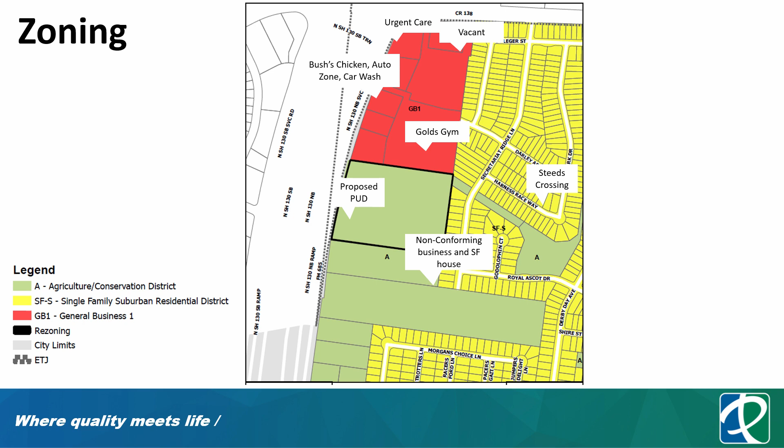The site is bolded - it's the area in the bolded black outline just to the north. In red is zoned GB1, our general business 1 zoning district. Existing uses there include the Gold's Gym, a few commercial uses along the frontage road. To the east of the subject property is the Steeds Crossing single family residential neighborhood. Immediately to the south is zoned Agriculture/Conservation District, and as you see here, there's a non-conforming business and a single-family house. To the west of the subject property is the SH-130 corridor.

The comprehensive plan for this area calls out a future land use of mixed-use commercial. Mixed-use commercial is intended in the comprehensive plan to be more for high-intensity development, including retail and commercial. The comprehensive plan also identifies an ideal mix of land uses in these future land use districts, and in this case it calls for roughly a 75 to 25 split, with the majority of the land uses being non-residential.

Of those non-residential uses, retail is the preferred non-residential type. The subject property is also located within the Commons District, one of our neighborhood districts also adopted in the comprehensive plan. The Commons District consists of several different types of existing land uses - single family throughout existing neighborhoods, and along the corridor more intense retail and commercial development. This current site is on the furthermost western portion of the Commons District.

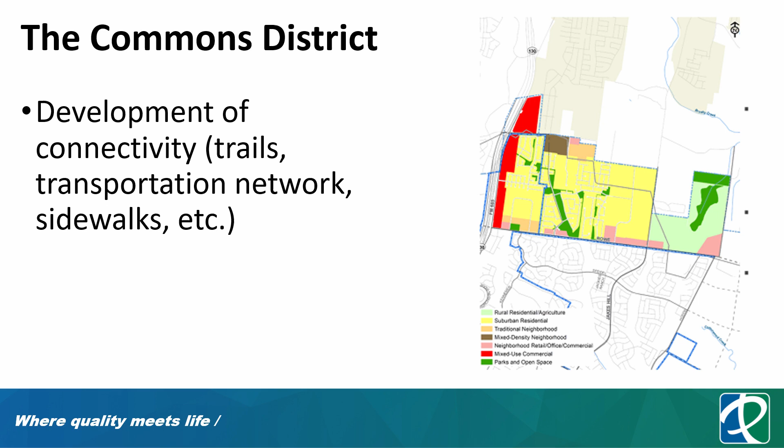So the request under review tonight is again for the planned unit development zoning district with a base district of CL4. I'll run through some of the proposed development regulations, and we'll have a few slides that show the concept plan, the layout, and landscaping plan.

Again, as y'all might recall from last week, we talked about planned unit developments. These are much more high level, more detailed development review processes. So what you're reviewing now is what we as city staff would review further future applications based on the UDC guidelines, and that will vary depending.

The first is the density. The first requirement is that it limits the maximum density to 40 dwelling units per acre, and that calculates roughly to 470 multifamily units and 10 townhouse units.

There's a minimum of 17,000 square feet of walk-up commercial retail that's integrated vertical mixed use for the structures along the 130 corridor. Multifamily and townhouse would be allowed by right.

It's proposing an enhanced buffer adjacent to the Steeds Crossing neighborhood. Everything immediately adjacent to Steeds Crossing has a higher buffer requirement than what would be under the base code. We'll get into that again in a little bit. It's also proposing structured parking.

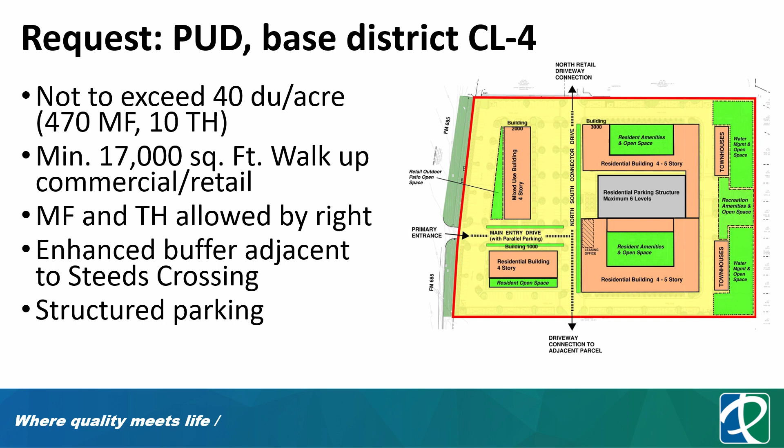So here you see the location and orientation of the buffer. Everything to the far east of this tract is the Steeds Crossing neighborhood.

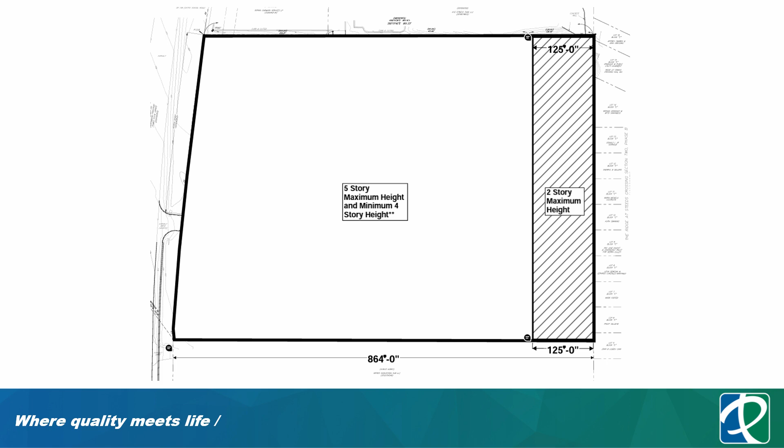The proposed PUD includes a 125-foot buffer where the maximum height is set at 2 stories. Everything outside of that hatched mark area has a maximum building height of 5 stories and a minimum height of 4 stories.

There's a minimum density requirement of 10 dwelling units per acre, and that's to encourage the mix of uses so that it's not all commercial or not all residential. It also is proposing enhanced landscaping along the Main Street entry point.

So these roads throughout are proposed to be private drives, not public right-of-way. The proposal identifies it as the Main Street, but it is really a private drive. And along those private drives, the PUD is also proposing additional landscaping, additional trees and plantings.

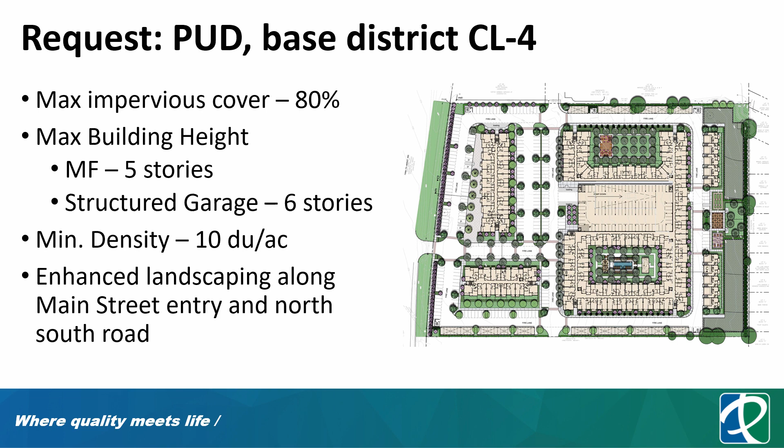Here we have more detail of the concept plan. Starting on the eastern side, you see the 125-foot buffer. This is where the proposed open space and water detention is planned to be located, as well as the townhomes.

On the far western side, along the 685 frontage, you see the mixed use, the 4-story mixed use, vertical mixed use buildings. And then in the center are the residential buildings, the 4 and 5-story residential buildings. Between those two is the structured parking.

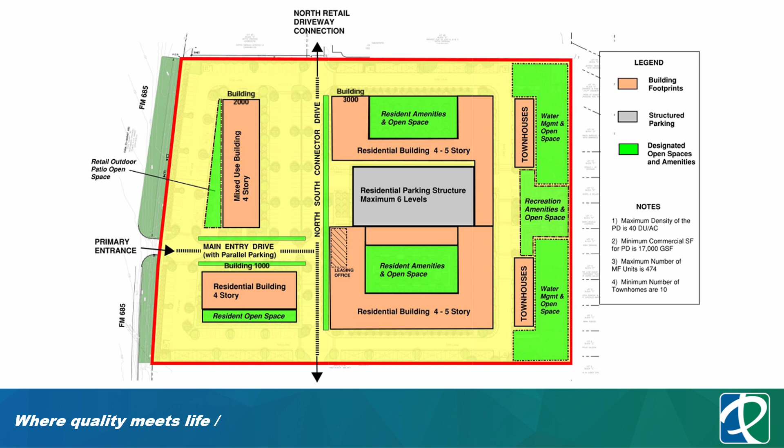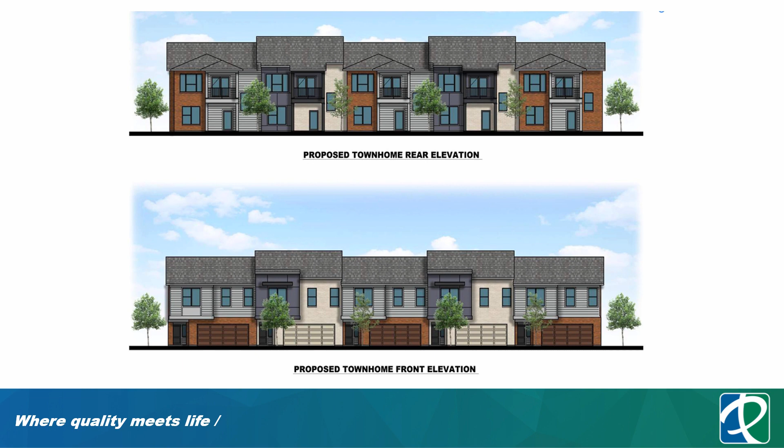The next few slides will just be renderings of what the eventual structures might look like. This is the townhome exhibit. This is the rendering of the structures along 685. And these are the interior structures, primarily residential structures located in the interior of the site.

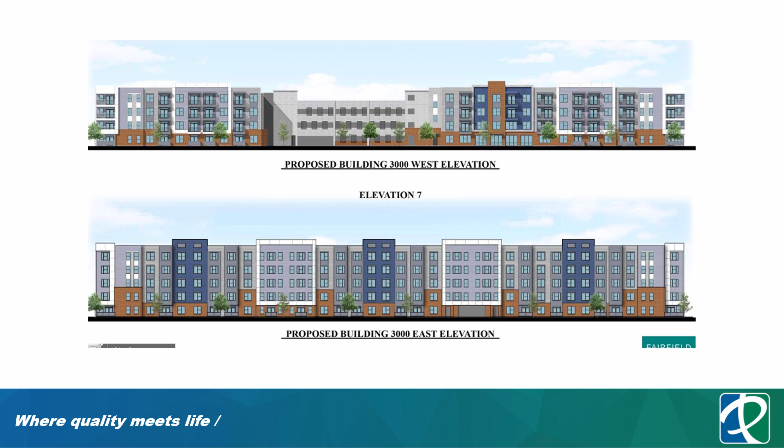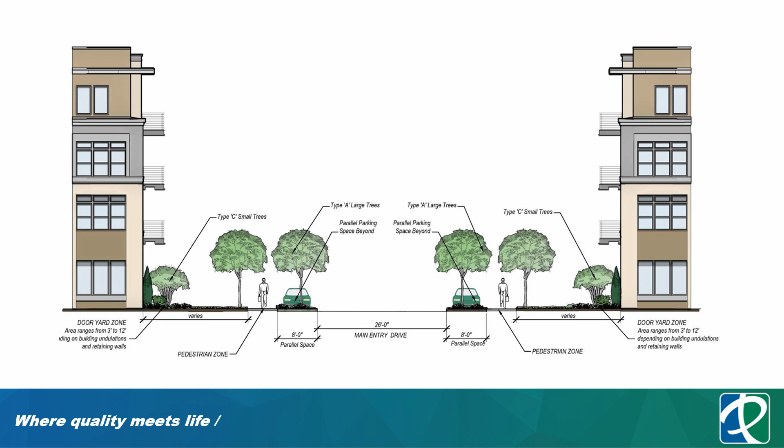The PUD is proposing a streetscape of 15 feet versus the 25 feet required by code. This was included to match an adjacent property just to the north, to create some more seamless development patterns between adjacent uses. And then sidewalks will be extended throughout the private drives.

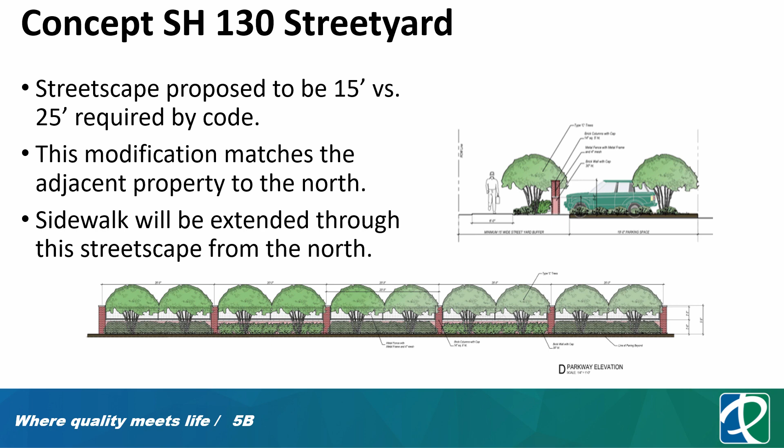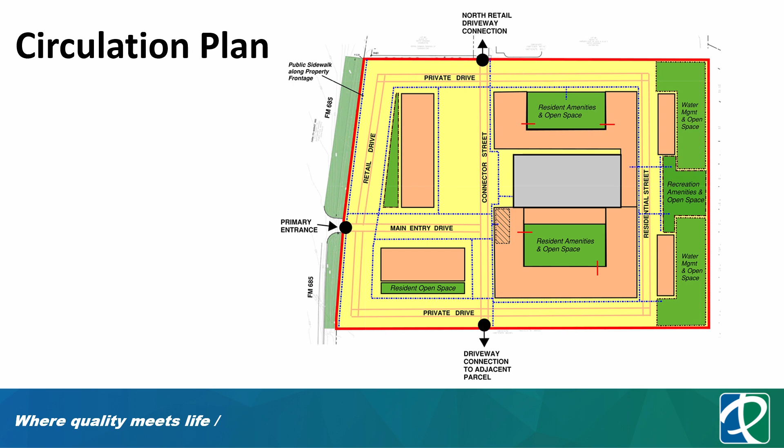Here's the image of the circulation plan. The hatched blue lines show where the sidewalks are proposed to be located, so you can see there are sidewalks provided throughout.

With that, staff recommends approval of the planned unit development as presented. That concludes staff presentation. The applicant is here as well, and they have a short presentation, and then after public speaking, I'll come up and be available to answer any questions.

Hi, good evening. Oh, sorry. No, you're good, I'm impressed by this. Y'all did a really great job very quickly for the record. Good job, it was guys, really impressive to watch.

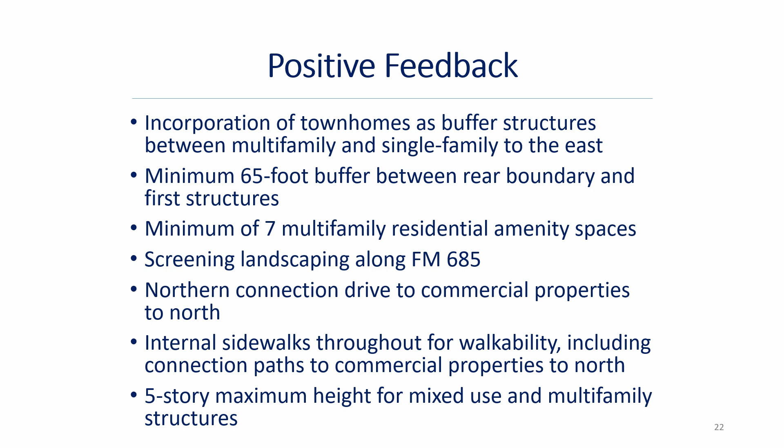And then even within that, the 65-foot buffer, increasing the number of residential amenities, the additional screening, the northern connection—again, we realigned that—internal sidewalks, and then the maximum height of the multifamily structures.

Staff really hit most of these, so I'll jump through it in the interest of time, but it is a true mixed-use project. It has the 5-story maximum, 6 stories for the parking garage. Parking garage floor plates are different, so to make that work, that is what that modification is for. And then the stormwater facilities on site—I think that's really important.

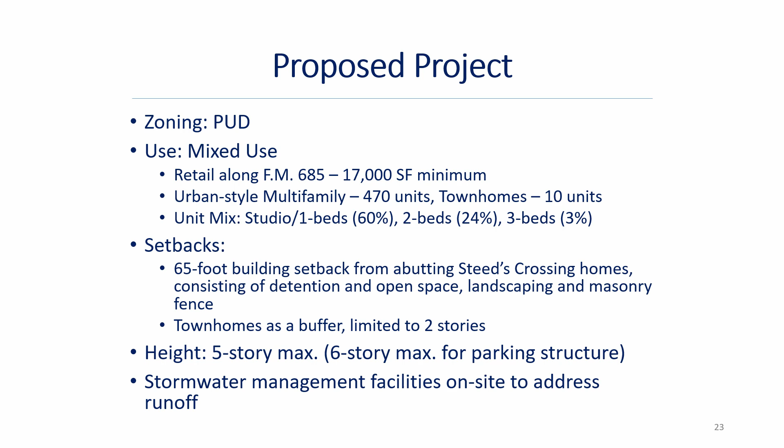Today, this property sheet flows when it rains. The rain rolls straight into the neighborhoods to the east. This property will provide on-site detention and water quality, meaning the water that comes in, we will have to detain it and then slowly filter it out so that it will not sheet flow and flood the houses like it currently does today.

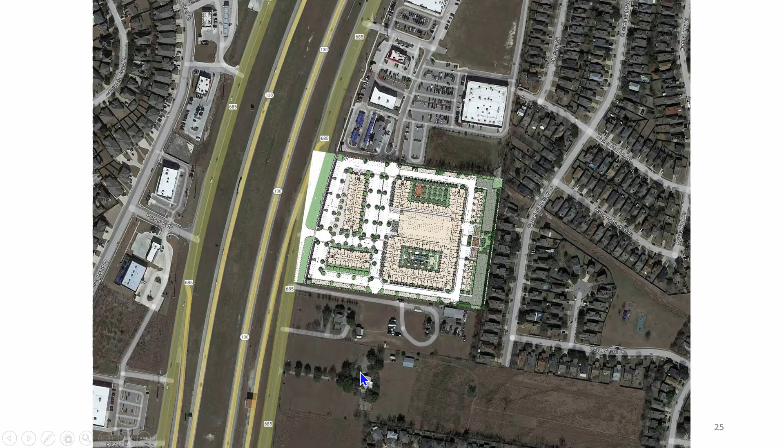Did you talk about open space? Open space—we did get permission from the Parks and Recreation Board to provide a fee in lieu. That being said, we are still providing a whole lot of on-site open space. It's not like we're not providing amenities, but there will be a fee of over $500,000.

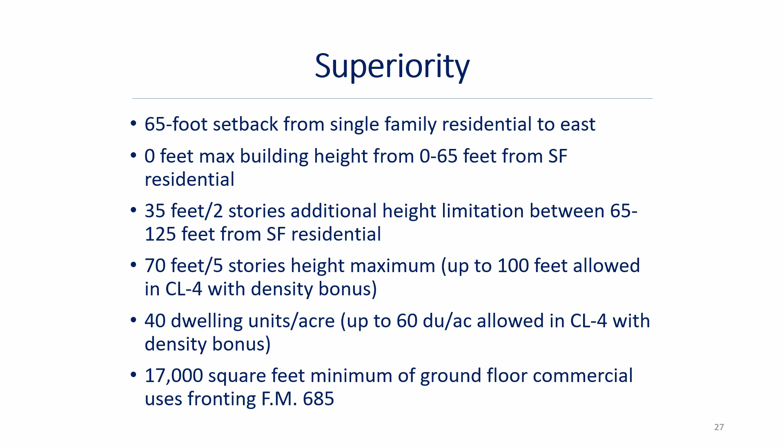Staff really talked through the superiority items with the setbacks, the dwelling units per acre, all of those items. I'm happy to talk about them more, but in the interest of time we'll go through these. I will say that we have prohibited some of the uses that you would not otherwise want to see on the site.

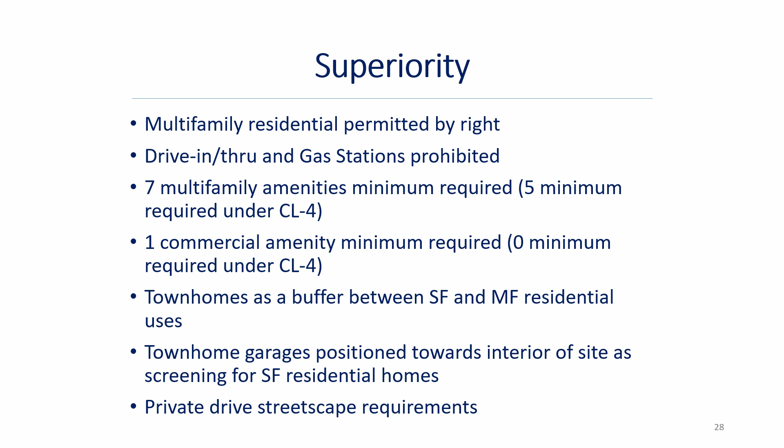Traffic—this is the piece that I know everyone wants to talk about. The TIA has been completed. Under the City of Pflugerville, the TIA is not reviewed until you're at the site plan stage. So it is done, we have done our studies. It is in the city's hands, but it won't be reviewed until—hopefully when—a zoning were to be approved and an actual project were to move forward.

What we definitely learned, though, is that there still needs to be a conversation about traffic. So we had some transportation engineers provide us some numbers. This property has been up for sale, will be up for sale. This property will develop—it will not stay agricultural. It's a matter of whether the property develops with, as staff presented to y'all last time, GB making sense, or CL4.

Those are the two categories that would really make sense in this area. Under a GB, you would likely get some type of shopping center use. Under a CL4 straight zoning, to make the site work with the topography, you would have someone build structured parking that could build up to 60 units an acre.

What we are proposing is something in between. We are providing the structured parking, but we are not hitting the 60 units per acre. We are hitting 40 units per acre, where 20 is allowed by right, so only 50% of that bonus, while still providing a substantial amount of structured parking.

I think the numbers tell you a lot about this. Traffic is real, traffic exists here. I drive by it all the time, you all drive by it all the time. Anybody who says that's not a real thing isn't being honest. But what I wanted to point out is the difference in the trips per day.

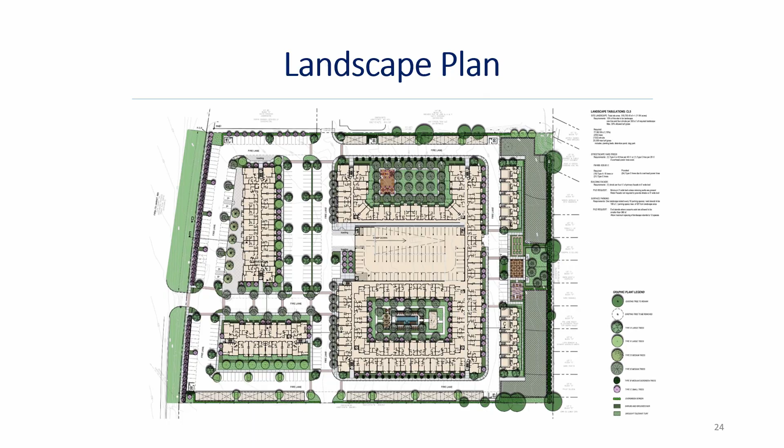I just wanted to say thank you for anticipating the questions about traffic and getting all of those entities together, because as I was looking at this, we all know that the traffic concerns there are valid and it's a snarl. Did you happen to, in the meetings with those four entities, hear anything about it? And this might be a better question for staff, but a timeline on the Rowe Lane flyover - does anybody have that yet?

Nathan Jones, planning manager again. So there are, as Amanda mentioned, several different jurisdictions that have several different projects at play here. Actually one of the items on the agenda tonight is to talk about the CIP project. We have the SH 130 corridor plan - we'll go into much more detail later on tonight, but the intent of that plan is to identify projects, identify needs, and then make proposals for how those mitigations will be approved.

In terms of your flyover project, I know Williamson County is the lead on that. You were asking about Rowe Lane - it's just south of this particular project, and that's a design that they're looking at, but there's not a planned time frame for the implementation at this point. So they're in the design phase? It is in design phase? Yeah, we said the same thing.

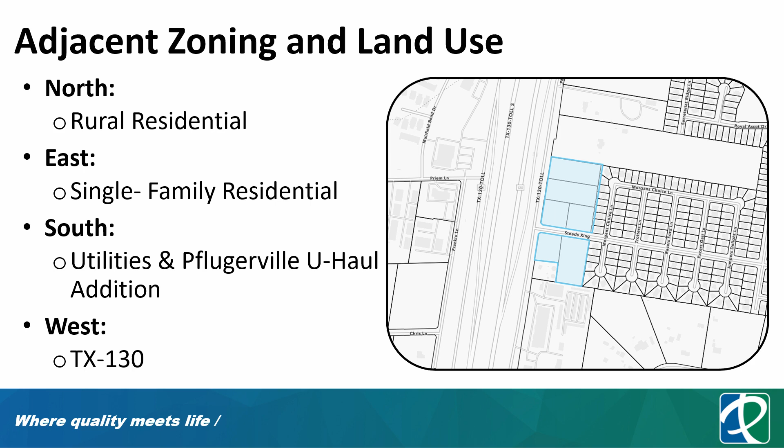For the adjacent zoning and land uses: to the north of the subject tract is a single-family rural residence, to the east is Steeds Crossing suburb, to the south in the southwest corner is utilities, and beneath the tract is U-Haul, and to the west is State Highway 130.

For the Aspire Pflugerville 2040 plan, it is called out as mixed-use commercial, which includes high-intensity mixed use, high-density residential development, and specialty shopping, dining and entertainment. The residential is suggested to be mid to high rise with compact block structure and a highly walkable urban form.

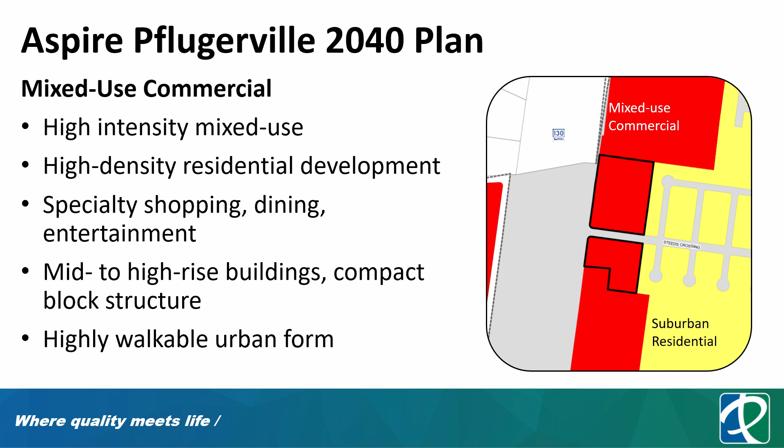The Aspire Comprehensive Plan also calls out, as in the previous case, that it should be 75% non-residential and 25% residential, with the majority being retail.

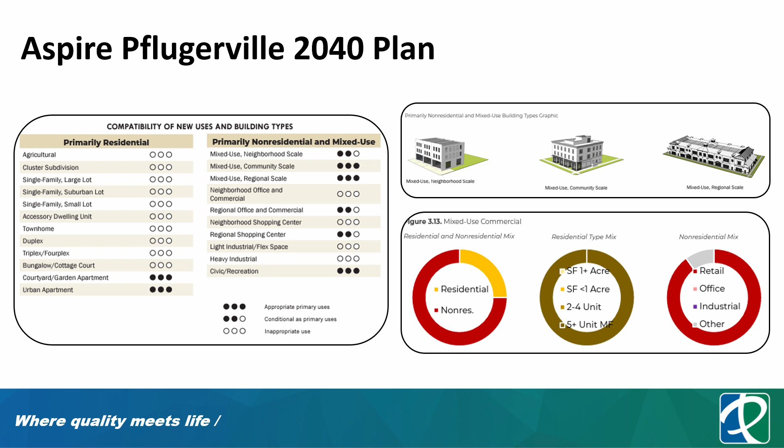This tract is also in the Commons District, and the district is showing some shifts — previously older housing, and now shifting more towards commercial and intense residential land uses. There are intentions, and a recognized need, to increase connectivity.

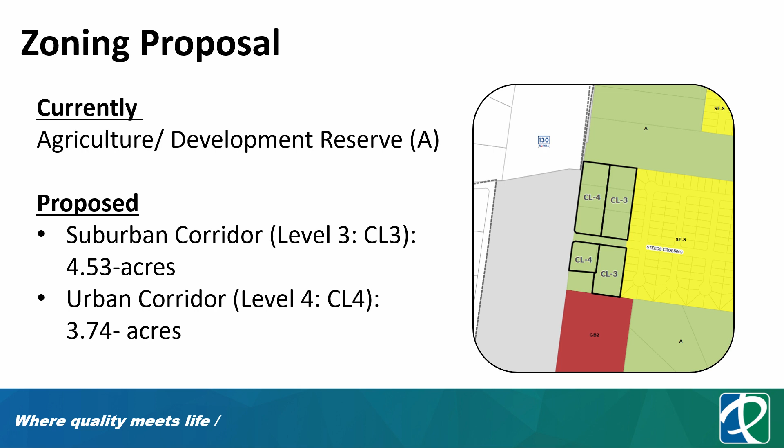The property is currently zoned Agriculture and Development Reserve, and the proposal is Suburban Corridor Level 3, just over 4.5 acres, on the eastern side neighboring Steeds Crossing, and CL4, Urban Level CL4, for 3.74 acres abutting Highway 130.

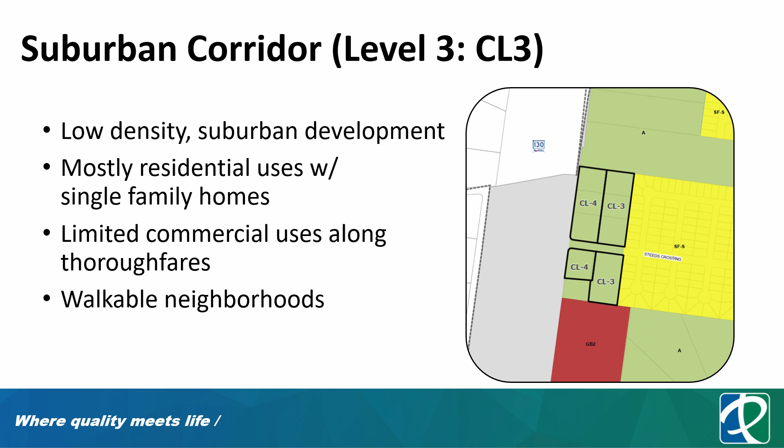The Suburban Corridor District, CL3, is intended to have lower density suburban development, mostly residential uses and single-family homes, and limited commercial uses, emphasizing walkable neighborhoods. So CL3 is an ideal zoning for this tract because it transitions seamlessly from single-family suburban to intense residential and commercial.

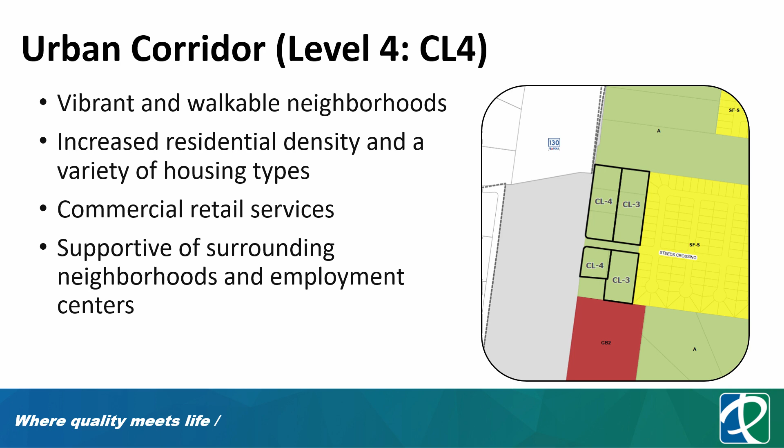The Urban Corridor District 4, along 685, is defined to have vibrant and walkable neighborhoods, increased residential densities, a variety of housing types, commercial retail services, and is supposed to be supportive of surrounding neighborhoods and employment centers. So CL4 works well in this location along SH 130, allowing for vertical mixed use and more intense development neighboring the primary thoroughfare.

These are images of the existing conditions. The top two images are standing on FM 685 facing east, with the one on the right looking north and on the left looking south. The two lower images are on Steeds Crossing facing north and south.

The proposed zoning aligns with the comprehensive plan and is cohesive with surrounding land uses, and staff recommends approval. This concludes staff presentation, and we do have our applicant here as well.

Hi, my name is Stu Oldham. I'm an architect with SKB Architecture. I've been working and living in the Austin area for 30 years. I'm representing the owner of this project.

I won't go into it, Samantha has already explained it well, generally what we're doing. We're looking for a zone change, and that's really all we're here for. We do intend to comply with the Aspire plan. We're trying to do everything that we've been asked to do.

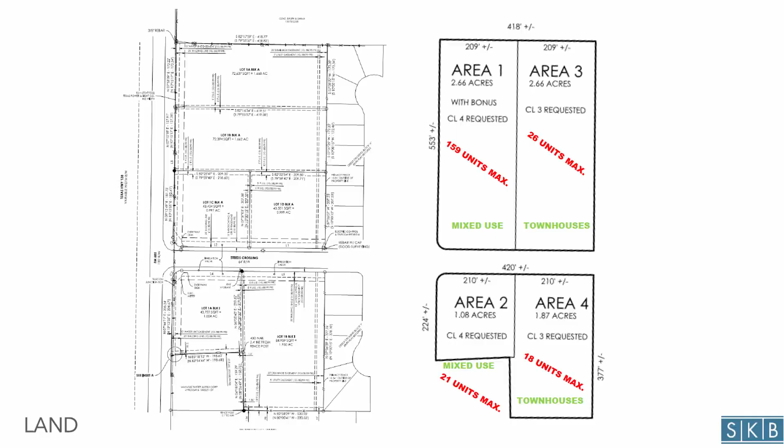And it's awful. So I know that the first project was approved, and that's the one right behind us. But I would like the opportunity, if there's anything we can do, anybody we need to talk to about improving the conditions in that area. It's actually impossible to get anywhere - anybody that's driven that, we all know. But the safety on Derby Day is a huge thing, and we've talked to Mayor Gonzalez a couple of times. He's come to our meetings about speed bumps of some sort. And I know those aren't allowed in the city of Pflugerville, but any kind of even a low level, low profile, anything going down Derby Day would definitely help.

Both of these projects, even though they're beautiful, it's the housing, it's the residents that are the issue, not the businesses, because they're going to have no choice. But when they leave, that 685 only goes one way, they have to come around. If they go shopping to the north, they will have to come around through our neighborhood. So anything we can do, if anybody has any recommendations, if we can get a meeting with anybody, we would sure appreciate that, because it's been a real struggle.

I've been to every meeting for the South Loop. The only thing that's going to be done by this summer is they'll give us our turn lane back, and they'll have the right-hand lane going from Hutto coming up. There will be a dedicated lane. That's all that's going to be done by summer, and that won't help either one of these new developments.

Those folks will still have to come through our neighborhood to get home, because they're sure not going to go towards Kelly Lane. As I stated in my email, nobody wants to go towards Kelly Lane at peak times. So anything y'all can recommend to the city, or any meetings we can get, would be truly appreciated, because when these projects go in, it's just that many more people on the streets. We don't know what else to do.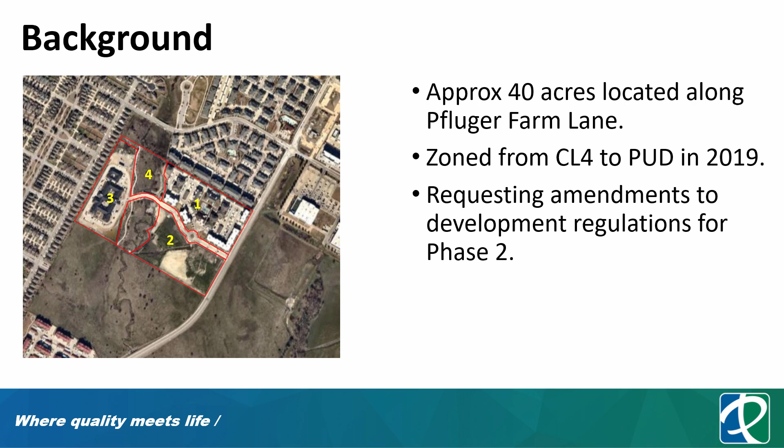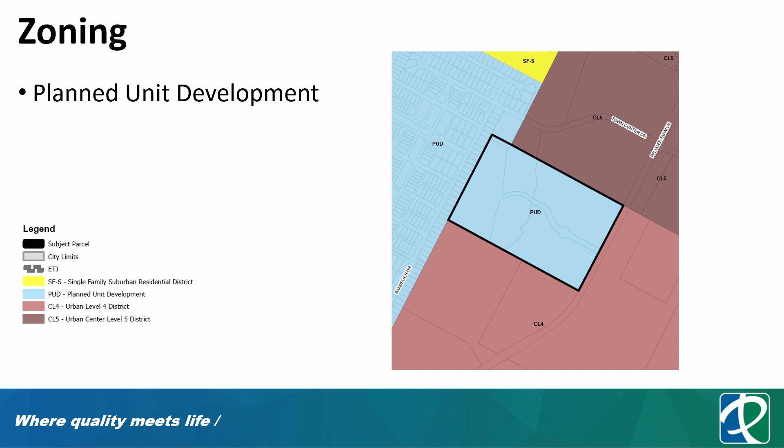Apologies, Chair. Again, Pfluger Farm PUD amendments relate to Phase 2. Zoning on the site is currently PUD. To the north is CL5 zoning district, currently developed with multifamily residential. To the south is undeveloped CL4. To the west is another single-family based planned unit development. The comprehensive plan for this site is called out as mixed density neighborhood.

The mixed density neighborhood future land use is identified and described in the comprehensive plan to provide a transition between the more intense mixed use commercial seen along the corridors and the lower density single family further toward the interior of the city. It acts as a buffer or transition to the more traditional housing types of single-family residential. It also includes a strip of parks and open space identifying future locations of parks.

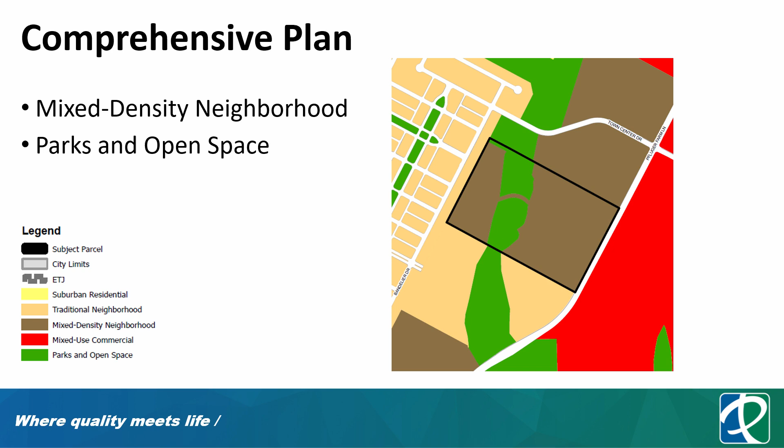This is part of an existing PUD. The PUD approved in 2019 originally envisioned three different phases of development and a parks and trails system throughout. Phase 1 was intended to be mixed-use multifamily, with an incorporated retail commercial component. Phase 3 was anticipated to be a senior living facility. Phase 4 is the location of the parks and trails system. Phase 2 would match Phase 1 on the other side of the private drive, also multifamily with an additional retail component.

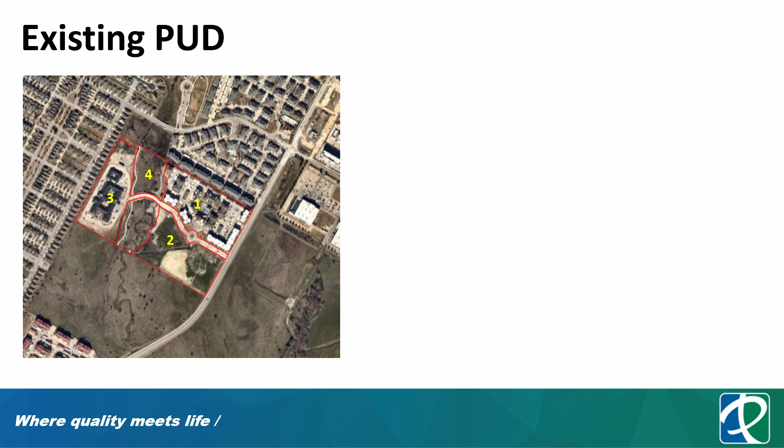The proposed amendments relate only to Phase 2, not the entire development. The proposal is to increase the maximum number of units from 473 to 583. It would allow 4-story buildings. It would increase the height maximum from 50 feet to 60 feet along Pfluger Farm Lane. It would also propose an increase in the maximum building length from 300 feet to 400 feet along the interior road, and increase the maximum distance between accessible covered breezeway entries from 125 to 200.

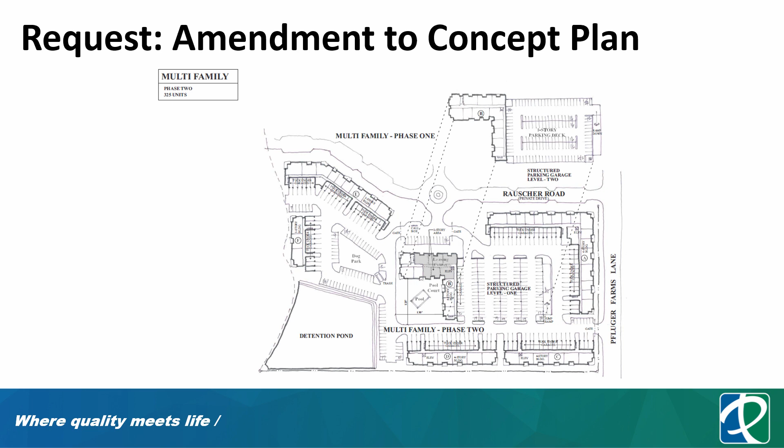Here are some images of the concept plan proposed to be added into the PUD regulations. At the corner between Rauscher Road and Pfluger Farms is a multifamily, vertical mixed use product. Further toward the interior you start to see more of the multifamily residential. The detention is on the western portion.

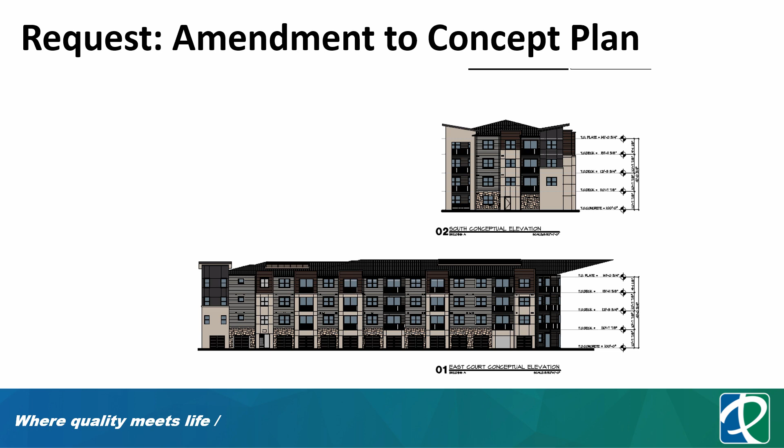That concludes staff presentation. Staff recommends approval as presented of the PUD regulations. We also have the applicant here, who has a short presentation. They'll go through their slides and we'll be available for questions after.

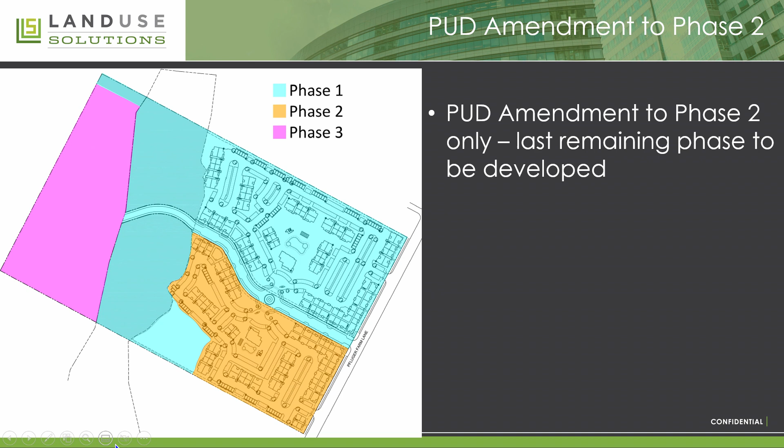As Mr. Jones mentioned, I'll use the pointer here. The detention exists right here.

I put this exhibit together to show that the PUD amendment as filed covers the whole 40 acres, but the amendment itself only applies to the orange tract. So the increase in height from 50 feet to 60 feet, allowing 4 stories, is only within the orange tract, along with the other amendments.

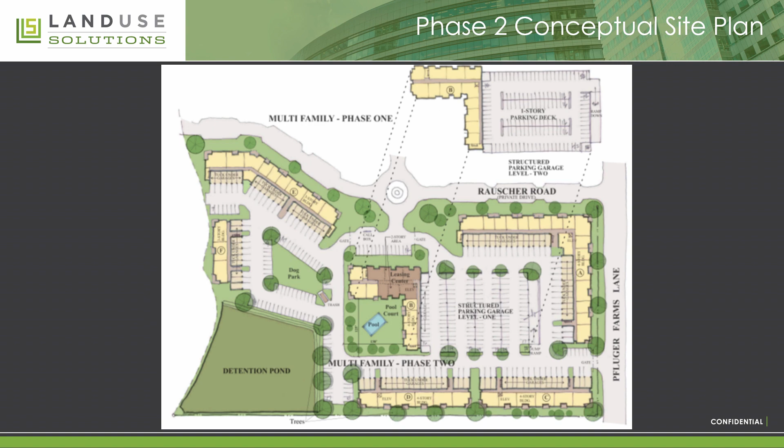This shows the 4-story buildings along the southern portion of the property, and along Pfluger Farm Lane and Rauscher Road. That's where the 4 stories would be located. Everything beyond that point, on the back portion of the property, is 3 stories.

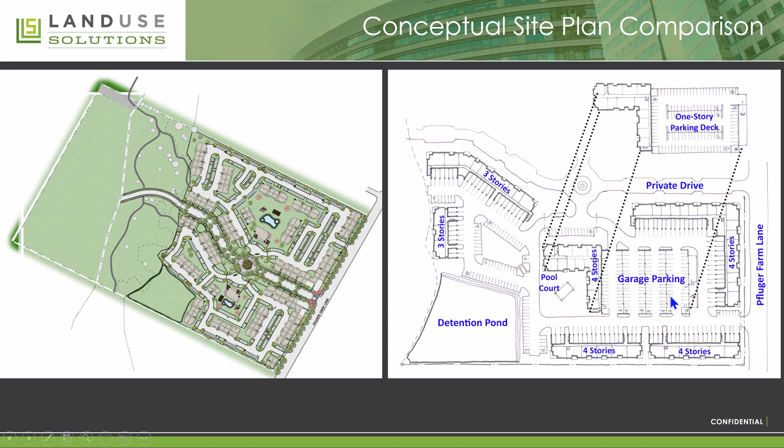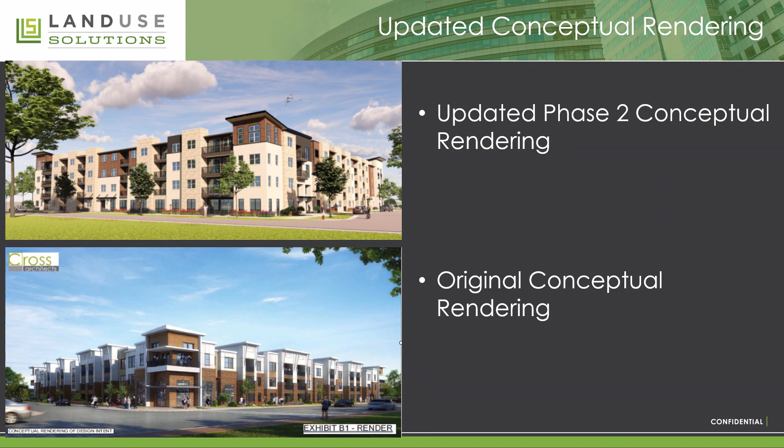The PUD amendment redline in your backup material has the Phase 2 conceptual plan, which will be added to the PUD document to maintain a consistent look and feel with Phase 1, which is 90% complete. This gives you that general image, and it will become part of the city's zoning ordinance document. I'm available for questions. City staff supports this, and we respectfully request your support. Thank you for your time tonight and your service to the community.

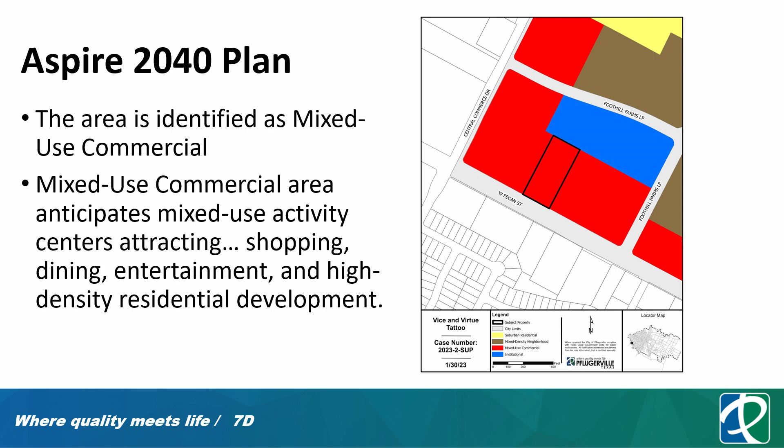The city's Aspire 2040 comprehensive plan in its future land use map identifies this area as mixed-use commercial. Mixed-use commercial anticipates high-activity centers with a variety of uses, including shopping, dining, entertainment, and dense residential. It's meant to be an area that attracts people.

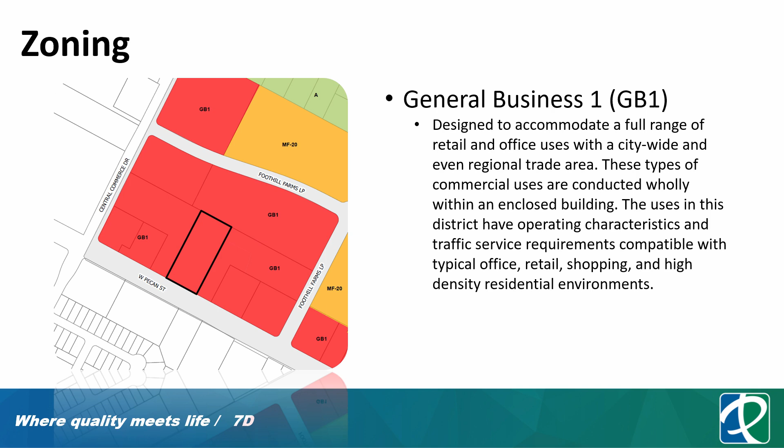The General Business 1 zoning district is designed to accommodate a full range of retail and office uses within a citywide and even regional trade area. These types of commercial uses are conducted wholly within an enclosed building, and the uses in this district have operating characteristics and traffic service requirements compatible with typical office, retail, shopping, and high-density residential environments.

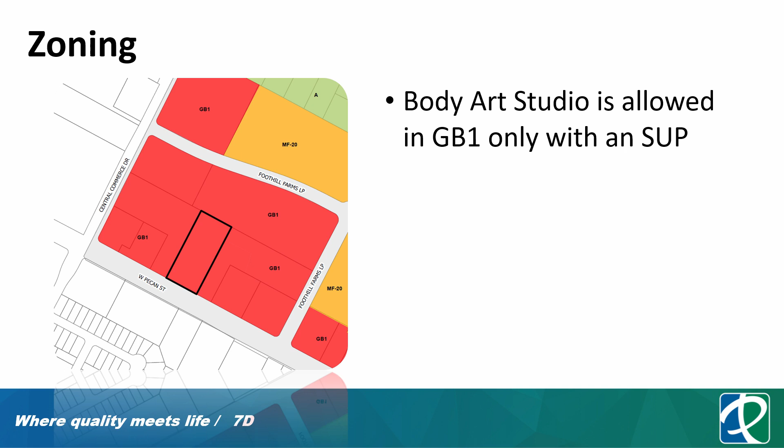A body art studio is allowed in General Business 1, but only with a specific use permit, an SUP. Body art studios are not allowed by right in any zoning district in Pflugerville. So what is an SUP? An SUP requirement means that this use isn't allowed by right, and it is required to go through an additional layer of scrutiny through the Planning and Zoning Commission and City Council to ensure that it is compatible with surrounding uses. When you are choosing to approve an SUP, please use these as a rubric for judging it.

Is it harmonious and compatible with surrounding uses? Are the activities requested normally associated with the requested use? Is the nature of the use reasonable, and is there no adverse impact on the surrounding area?

Unit 110 is owned by the applicant, who is here today and will speak following my presentation. The applicant currently operates a similar studio for Vice and Virtue Tattoo located in Austin. The applicant purchased Unit 110 and intends to use this space for their second location. If approved, they will operate by appointment only and will not have walk-in traffic.

Business hours for the Body Art Studio will be limited to 12 p.m. to 7 p.m. Additionally, the business has a policy of 1 client per working artist. According to their letter of intent, they describe themselves as a high-end tattoo parlor set in an upscale minimalist setting. They currently employ 6 tattoo artists, and they will have 7 associated parking spaces, which satisfies the city's parking requirements for body art studios.

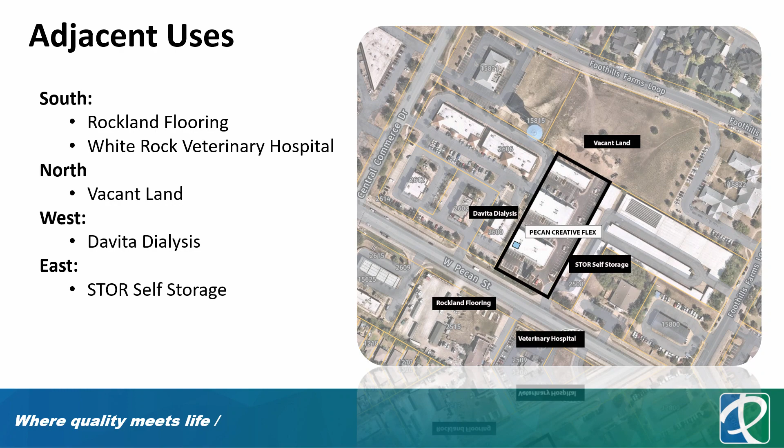One of the six guiding principles of the Aspire Pflugerville 2040 comprehensive plan is economic opportunities for all, which states the city welcomes new businesses and supports existing businesses and the growth of businesses that represent our diverse community. The plan lists an achievable goal for Pflugerville to increase the percentage of tax base from commercial and industrial properties to match the statewide average.

Staff finds that the proposed SUP for the Body Art Studio meets the intent of the mixed-use commercial future land use and furthers the goals identified in the comprehensive plan, taking into consideration the compatibility with surrounding uses, adequate parking capacity, and limited business hours. Staff recommends approval with the conditions on the following slide.

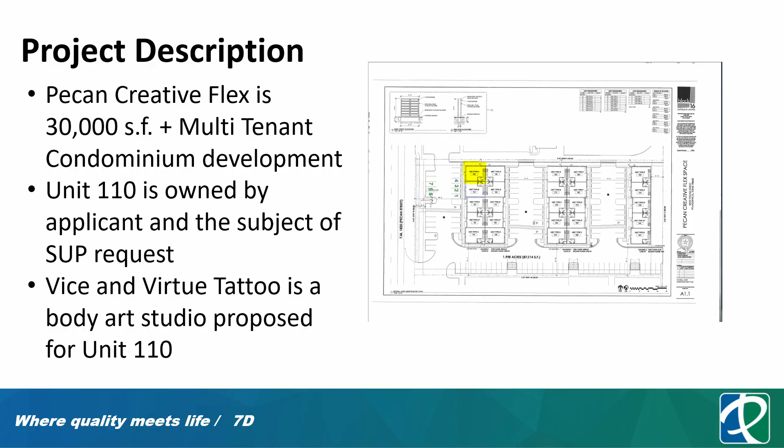That's right, I just want to say thank you for bringing a tax base to our city. Thanks for coming home. I actually went to high school in Pflugerville. We played you in football where I went to high school.

I move to approve the specific use permit, but strike the restriction on operating hours. Second. All in favor? Aye. All opposed? Motion passes. Thank you.

Item 6, discuss only. 6A, 2023-0303, discuss the 5-year capital improvement plan for fiscal year 2024 through 2028.

Uh-oh, how do I get out of it? All right, good evening. Andre Brinkley with our Capital Improvements and Engineering Department.

I hope you guys have enough energy to stay the course here. We have an attachment that you all have in hard copy, just in case you want to reference it. But I'll be moving swiftly through these slides. Before us today is the 5-year plan, which starts with our fiscal year 2024 and moves through 2028. So I'll get started.

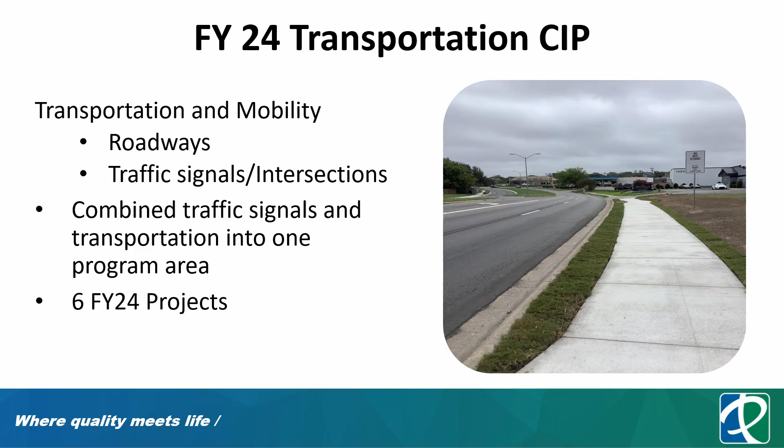So what I'm going to do is walk through, we're going to have a map, we're going to talk about some of the projects that may be near and dear to your heart that are already underway, and then some of the future projects that we have planned for 2024.

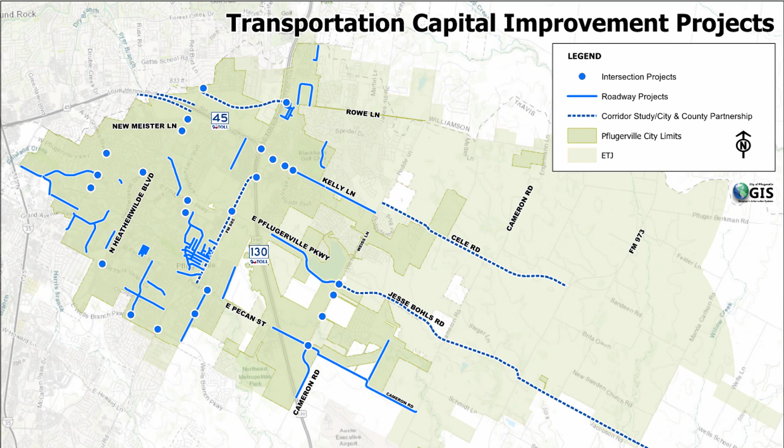So this is one that is already underway. We're just finishing design and going into construction. Hopefully in the next little while, we finish securing all the property that we needed. And this is a project that includes everything, really. It starts with streets, but the streets are in really poor condition, and it's a wholesale infrastructure redo.

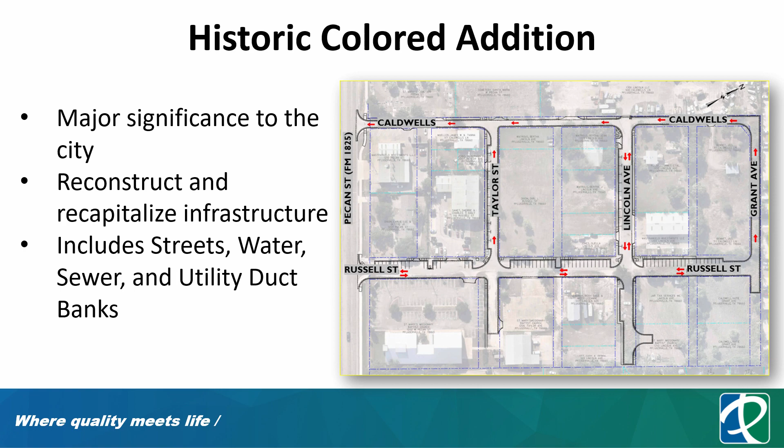Kelly Lane 2 and 3 - want to make sure y'all know the Phase 2 project is out for bid right now, and bids are due Thursday, so that'll be a big day. The Kelly Lane Phase 3 project will come closely on its heels. We're trying to get as much construction going as possible with a comprehensive traffic control plan.

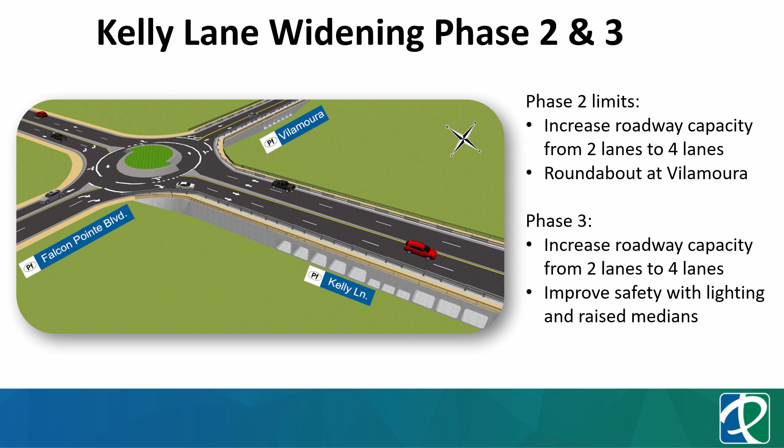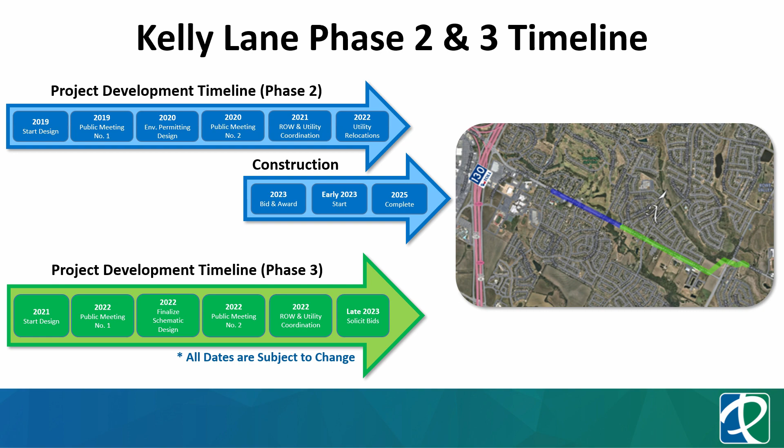A little bit on the timeline - we're starting with the blue segment and going into the green segment, so ultimately where the green segment ends is Hodde, Cele, and Weiss. We're going to have a brand new intersection by the time Phase 2 and Phase 3 are completed. I'll jump right into the 2024 plan.

Our mobility master plan, it's time to update it - I believe it was 2019. We want to make sure we do it quickly and that we're on point with anything that might have changed. Signals along the Olympic Drive corridor are identified in the transportation master plan, but we also see development pushing and want to address that quickly. This is the initiation of work along that corridor.

Weiss Lane widening - if you've driven at least to the high schools or any of the schools right there, there's also a fire station underway. There's a segment of Weiss that's not 4 lanes, just north of Pecan, or East Pecan, to address widening of that. Development is occurring and we're going to keep pace with that.

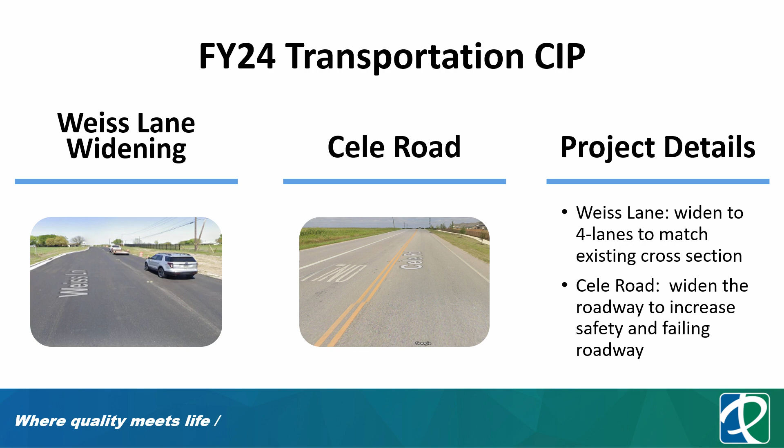Cele Road - this is a corridor study right now. There's a portion in the city and a portion in the county, so this is going from the corridor study into design.

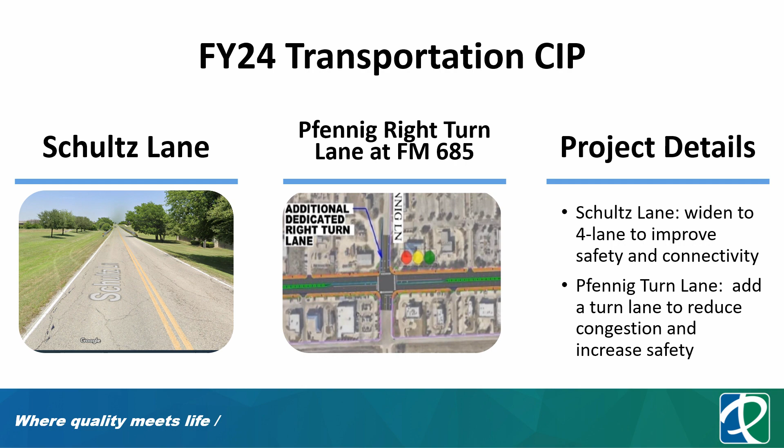Schultz Lane - as you can see, any Google Drive that can tell the pavement distress means it's a lot worse when you're actually up close and personal. This project may have potential developer participation, nothing firm yet, but this road needs to be recapitalized. Pfennig Lane - there's a right turn lane at FM 685 planned. Some of these turn lane improvements really help move traffic along, so easing congestion is the main goal.

All right, I'm going to turn it over to Jeff, and then I'll turn it back over to me in a minute.

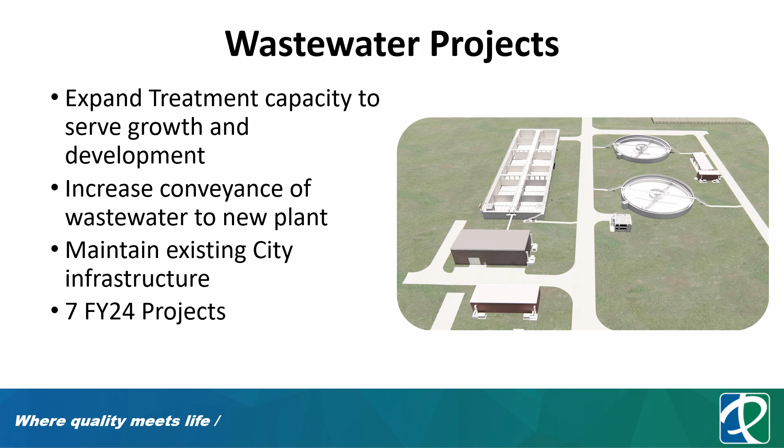Moving on, we have some new wastewater projects too. We're going to increase our treatment capacity and add new transmission lines, or interceptors, to convey our wastewater flow, while helping maintain our existing infrastructure. We have new lines at Wilbarger Interceptor, Kelly Lane Interceptor, and Sorrento Interceptor — large diameter pipelines. Because of interest, we are essentially developing wastewater in two additional new basins.

We have three basins within the community. We have the Central Wastewater Basin — that's the plant you may be aware of down around the County Metro Park. It's being updated and upgraded. We have a new plant proposed in the Wilbarger Basin — these are named essentially after the creek, since that's where all the wastewater tends to flow, the low area. Off to our far east, we have the Cottonwood Creek Basin. We'll be pumping wastewater from Cottonwood to Wilbarger Creek for a number of years until we reach capacity at Wilbarger, and we may have an additional plant at Willow Creek 20 to 30 years down the road — though I hope I'm retired by that time.

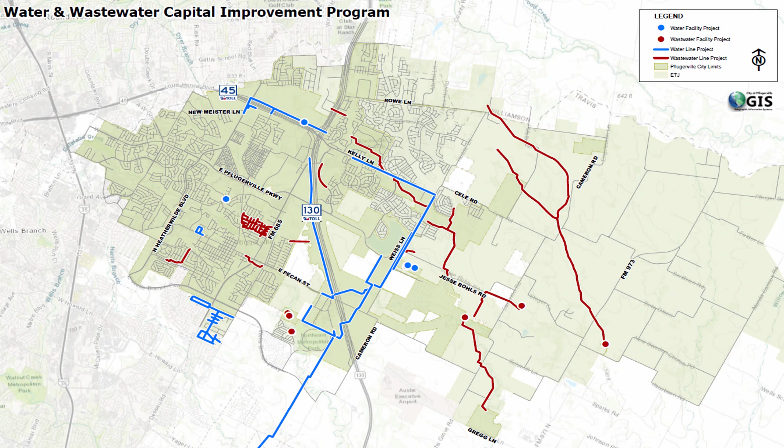As mentioned, there's our Central Wastewater Treatment Plant — it's going to increase our capacity. This is phase 2, using new technology to achieve what we refer to as BNR, biological nutrient removal. This will help us comply with our regulatory permits for our good friends at TCEQ.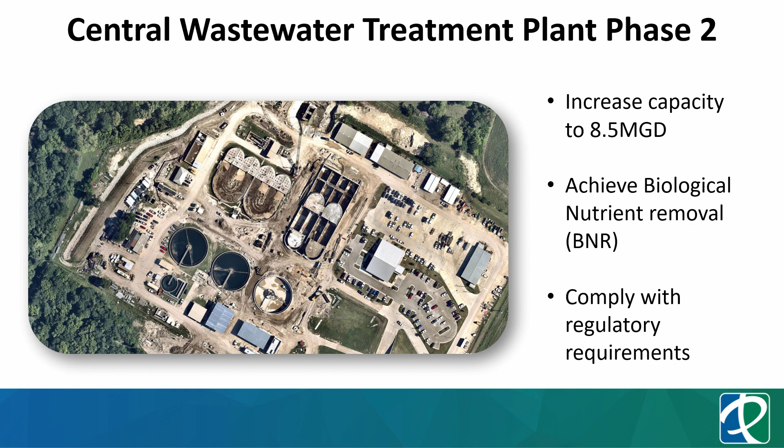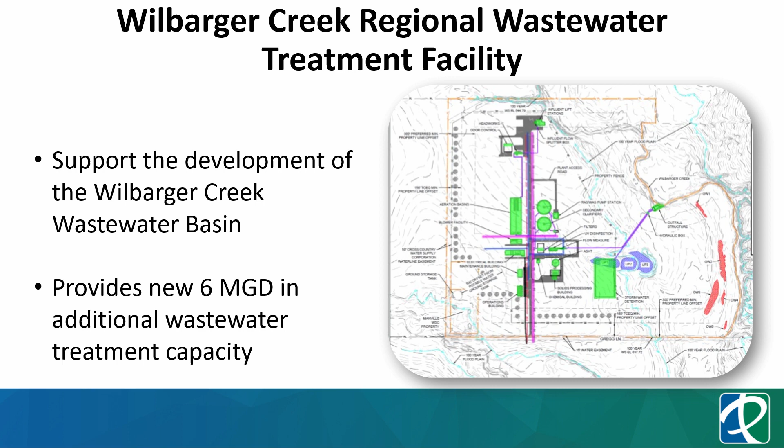This is the new regional Wilbarger Creek Regional Wastewater Treatment Facility. This has currently been bid, and we are in negotiations with a CMAR contractor, construction manager at risk. This is going to provide 6 million gallons per day in additional wastewater treatment capacity, and it's also going to take one of our old, outdated, aged lift stations out of service. It'll make our utility director very happy. We're looking forward to taking away that asset, it's close to becoming a liability. He wants that one taken offline, so we're happy to help him out with that.

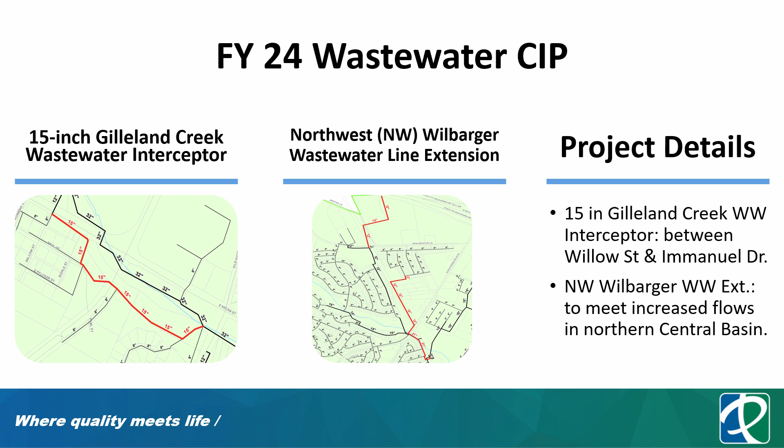These are some of our wastewater projects. We have the Gilleland Creek, the Northwest Wilbarger Wastewater Interceptor, and numerous others underway. Here are some additional wastewater treatment plants that we are directly involved with for operation and maintenance. Also, you're aware of our Downtown East Development, DTE. We'll have new facilities in place to serve that. It's necessary that we make all the necessary upgrades and have utilities in place when they're needed.

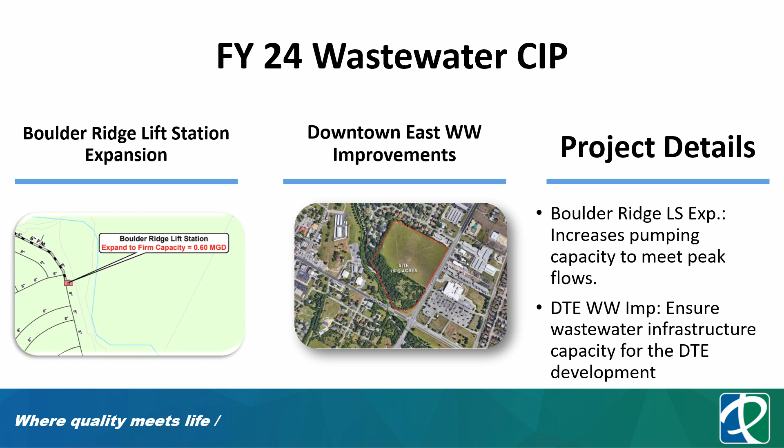We also have our wastewater master plan. There's a new lift station. This is in the Cottonwood basin area. The Cottonwood is the New Sweden lift station.

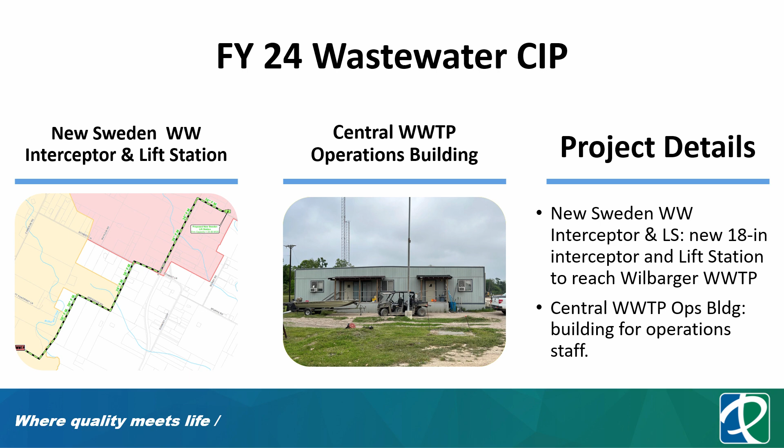Operation and maintenance - we've got a state-of-the-art wastewater treatment plant at our central station, but we don't have a state-of-the-art operations building. We're going to upgrade that. We're going to give our operators lab facilities, good offices that they can work out of and be proud of their plant. That was requested by our operations group. This helps promote environmental sustainability.

The wastewater master plan - do we have all of our labs outsourced today, or is this a new capability? We have some internal capability. Some of the more high-tech tests, the BOD and some of those, we outsource, I believe it's to Round Rock's lab. They have a full lab, but some of the titrations, the settlement, the single glass microscope, some of those tests we run internally. Got it, I was just curious, thanks. And they're a great group of guys, always got to appreciate the laboratory guys.

This is our updated wastewater master plan, and we also have underway the reclaimed water project. This is a big asset to the city. We're currently spending a lot of city dollars irrigating parks. The one that's really interesting is we use potable water to irrigate 1849 Park - I believe it's purchased from Manville, pumped to a lake, and pumped out of the lake for irrigation. Regardless of the cost, this is a great investment for the city. It saves us money in the long run, helps preserve our aquifer, and it'll be a good investment long term.

That's our first reclaimed water. We currently have only one reclaimed water client available now - we provide reclaimed water service to the county metro park. It's a big area, and when it's hot in the summer, they're a great customer. So it's their only customer, but that's why we're looking into the study. We're trying to find optimum routes for pipelines, optimum routes for where our heavy users are that could benefit the large landscape areas. But we have to look and think ahead, plan ahead. It's a great resource, we have to move into the new age.

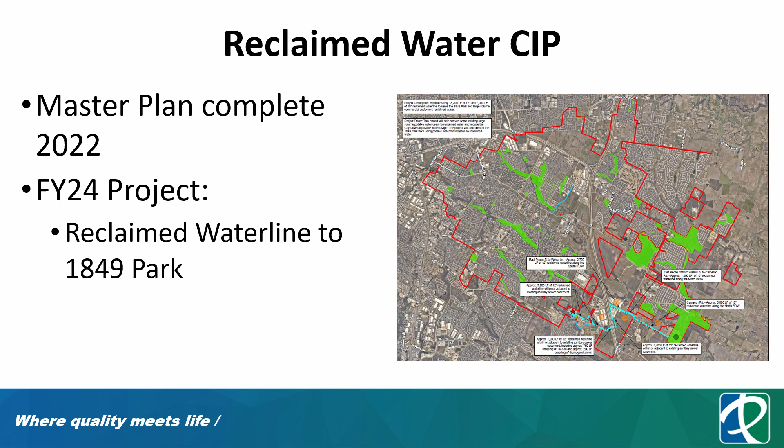So we've had some provisions or forethought, but we're years behind some of the other communities. We need this to help us step up our game with the master study, help us prioritize, and help us assign funds to the proper location, once again trying to be good stewards of best value to the city. Are you allowed to use decommissioned wastewater infrastructure for reclaimed water? Yes sir.

It's fine as long as it's clean and disinfected - before the contractor completed the work, they flushed the lines. We made them flush them three times. And of course, it's non-contact reclaimed water, so it's non-filtered, which makes it great for parks and golf courses.

And let's see here, drainage projects. Sorry, I'm kind of a stormwater geek, drainage geek. We civil engineers really thrive on this stuff. Impervious cover, C values, we can talk for hours, but I'll try not to delay you guys.

It is getting late. We have a master plan underway, or recently completed the drainage master plan last year. It's our endeavor to put forth a drainage utility that will help. Our fees will be able to help us fund operation and maintenance, as well as new infrastructure. I guess you've seen we've had occasional flooding that just reminds us why we need major civil engineering projects to undertake storm drains. New Atlas 14 rainfall data is out, and it's kind of scary.

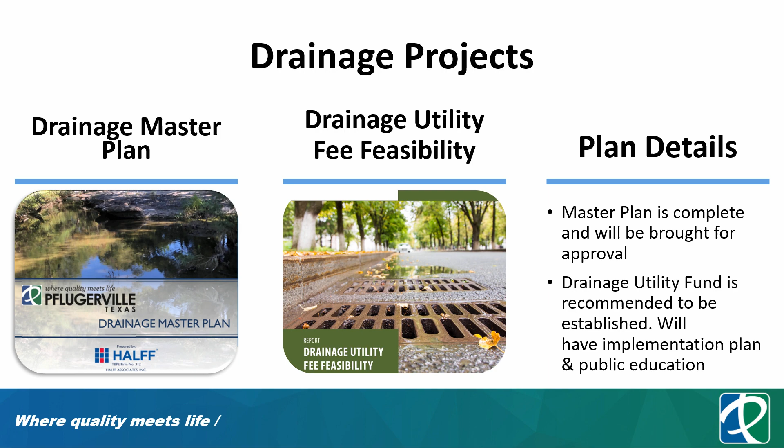It's about a 30% increase of what we've been experiencing before in a 100-year storm event. So with that, soon, not sure exactly when, FEMA's soon going to update their flood rate maps, and there's a number of our developments that are inundated.

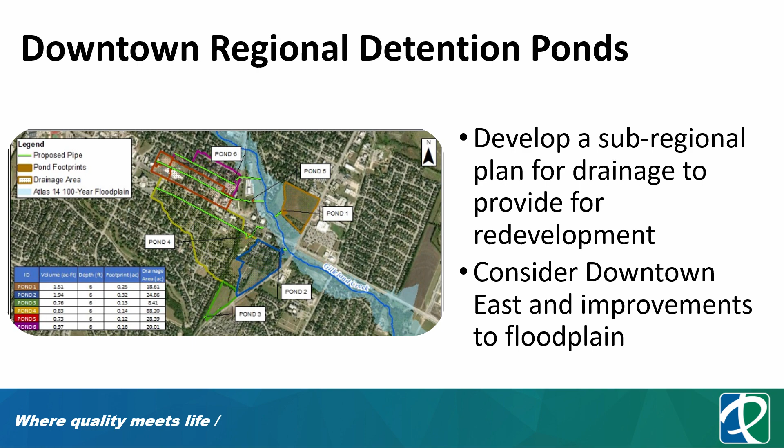I saw a couple on the list that are in 2-year floodplains. Much less a 50 or 100 year. Which means that's probably every year at this point. That's probably correct, that's every year. Yeah, and some of those, that's how we prioritize our projects - the ones that have the most benefit, the community receives the most benefit, out of the minimum cost value.

To help us prioritize all of those, we have projects on Immanuel Road. We have the Wilbarger Creek tributary, Caldwell Elementary. This is one of my, it's not the top priority, but it's one of my concerns that there's a number of homes inundated. And when the maps change, there may be concerns that the insurance may get costly for those homeowners, so we need to try to move ahead of the game.

We have conceptual plans for what we need to do to contain the floodplain, how we can put our best dollar forward to help mitigate some of the improvements. And at that point, I will turn it back over to Andrea. Thank you, appreciate your time.

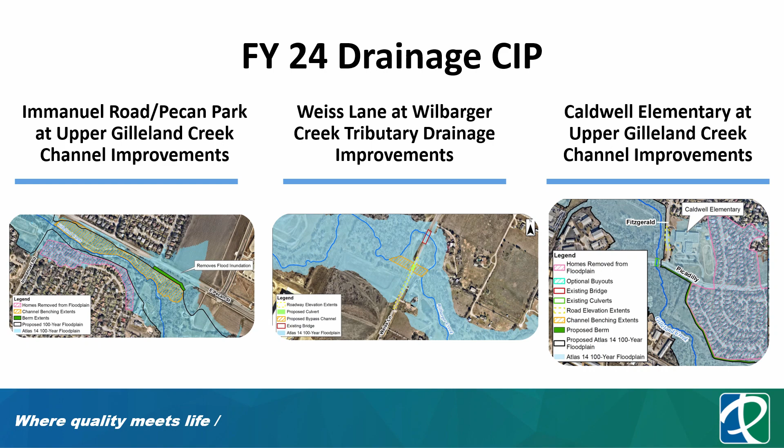Okay, let's talk about parks. All right, so parks and trails, as I mentioned before, I kind of group them because they're traditionally out of that operating department, but when we think about trails, I always think about not just recreation, but potentially the transportation connection.

So this is a park that is already in existence, but this is the next phase. We're planning some additional parking and lighting, but this is some additional fields. Basically, phase 1 of the park did not accomplish all of the parking. You may have been out there and said, this is kind of an area that looks like we could just extend the parking, and that's part of what we'll be doing with the construction of this phase. This is the phase that's kind of on the hill.

Is this a pretty major source of fees-in-lieu to build out since this is such a big park? That is a question that I'm not sure how to quite answer. Yeah, so in the Parks Master Plan, there are sectors where we can apply funds, and so it depends on where the different location is. But regional parks are also able to receive that. So, short answer is probably yes.

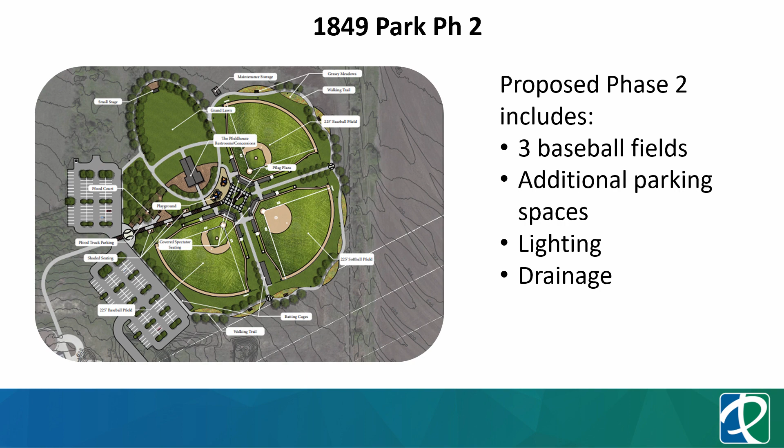Wells Point Park, this is an existing park, its improvements, we're adding new park facilities. Again, this idea of we will not stop addressing and improving different areas of the park as the years go by. We might replace some equipment, upgrade the facility, make it safe in terms of safety hazards that may have been there at one time. If you're familiar with parks across the country, equipment was all of a sudden deemed like, well, you can't have that, or you need this kind of base. So this is part of refurbishing and making sure that we have all of those amenities up to the right standard.

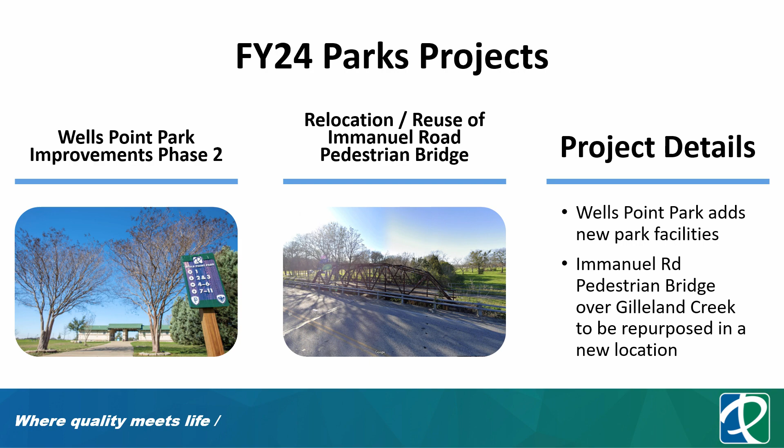All right, for our facilities, this is an area that, because of our explosive growth, if we think about even the building that Jeff and I work in, we're ready to have a second-story loft or cubby holes for people. It's the same throughout the city in terms of how do we face the future. It's not just that there's a lot of city staff, but this is about making sure that structures are there and they're resilient and able to house people that need to do things even in an emergency, or just for where the city is growing.

So there's a discussion about having a facility master plan. This is a location that the city's buildings are in now, but also a facility condition assessment. As projects like Downtown East with the new City Hall and multi-generational rec center come online, what the repurposing of the existing City Hall on West Main will have is a good discussion point. How we use the existing Public Works facility, and maybe there's the new Public Works complex. So there's a lot of discussion about what are our existing assets, do we need to recapitalize those? The building envelope is an important component.

I'm going to go back to Downtown East since I started talking about this. Basically, the heart of the building can't be ignored, but if you're going to continue to use it, you can't have an unhealthy building. The HVAC will eventually need to be replaced. We want to make sure that all of our buildings have good moisture prevention. But where these city facilities need to be, there's a lot of discussion about whether our existing PAWS facility is set up for additional demand with the growing population. Should our library be expanded, or what is the future of that library? Should there be some changes internally?

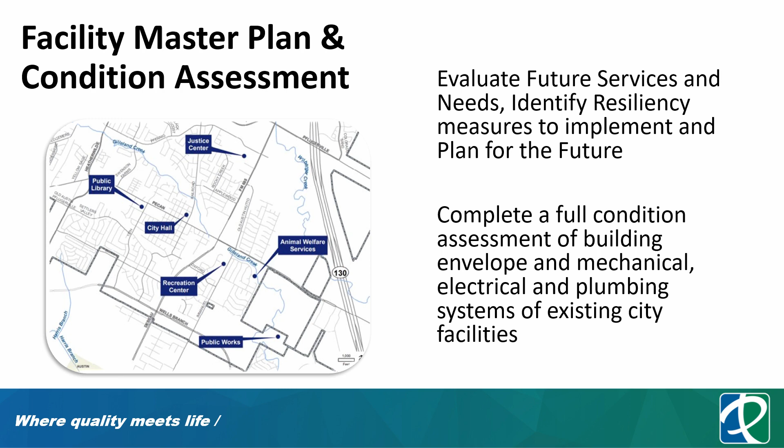So we want to make sure that's addressed, and that's part of what's going to be the endeavor, instead of single purpose projects, have a comprehensive approach. Maybe wouldn't gloss over either, maybe a minor metric, but certainly that's a recruiting and retention issue, I'd imagine, as well. If you bring somebody in to interview for a position and show them the closet over there, and that being their future office. I think in some cases, many of our departments actually have work from home almost as a necessity. So we want to make sure we provide the flexibility, which is also a retention thing.